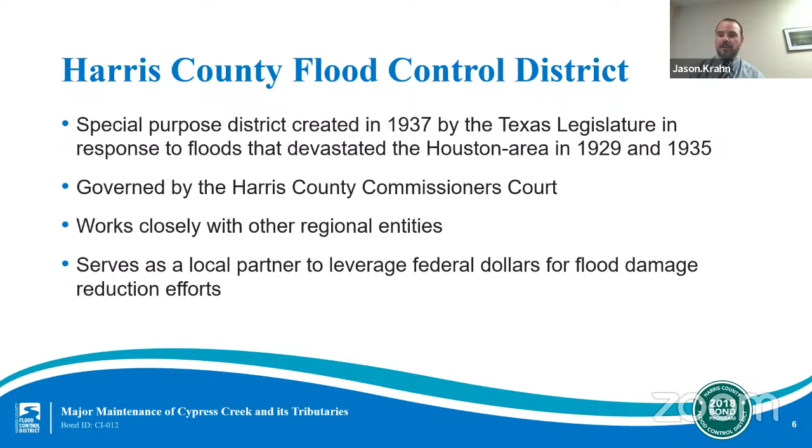The Flood Control District is a special purpose district created by the Texas State Legislature in 1937 in response to devastating floods that hit our region in 1929 and 1935. It is governed by the Harris County Commissioners Court and works closely with other public works entities, such as the Harris County Engineering Department and the City of Houston. Our organization was created in part to serve as a local partner and project sponsor to leverage federal funding for flood damage reduction projects. Since our creation, our mission has expanded, leading to billions of dollars in federal, state, and locally funded infrastructure improvements.

The Flood Control District's mission is to provide flood damage reduction projects that work with appropriate regard for community and natural values. Understanding that our systems mean many things to many people makes it challenging to construct effective projects that also provide the multifunctional use communities seek, as well as construct them with regard to natural values in our highly urbanized and continuously growing region.

Harris County includes 23 main watersheds, comprising approximately 1,800 square miles of land and more than 2,500 linear miles of channel. This includes man-made channels, natural streams, creeks, and bayous. To imagine the totality of this infrastructure, please note that 2,500 miles is approximately the distance between New York and California.

The 23 watersheds are all distinct geographical regions of land that serve as a catchment area that drains to a common main channel or drainage outlet. Each watershed has its own unique characteristics and needs based on its level of maturity and geographical location. The program and projects we are presenting tonight are in the Cypress Creek watershed, located in Northwest Harris County.

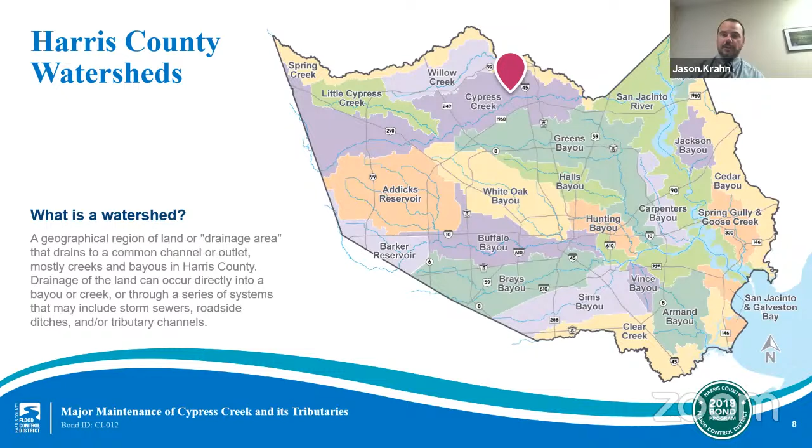Harris County and its surrounding area is flood prone for a number of reasons, namely because we experience extreme rainfall events along the Texas coast, including tropical storms and hurricanes. Our area has a largely flat topography with slow draining land. Finally, we have large concentrations of soil types, such as clays, that do not soak up excessive rainfall quickly.

While the Flood Control District plays a critical role in overall flood risk reduction for our area, we are one of several jurisdictional entities involved in the overall efforts for the region. When rain falls on your roof or other impervious cover, it flows through several jurisdictions, such as public and private driveways, parking lots and yards, and eventually into streets and drains managed by the Harris County Engineering Department or a municipal utility district or city, such as the City of Houston, before it flows into a larger basin, channel, or creek that the Flood Control District owns and maintains.

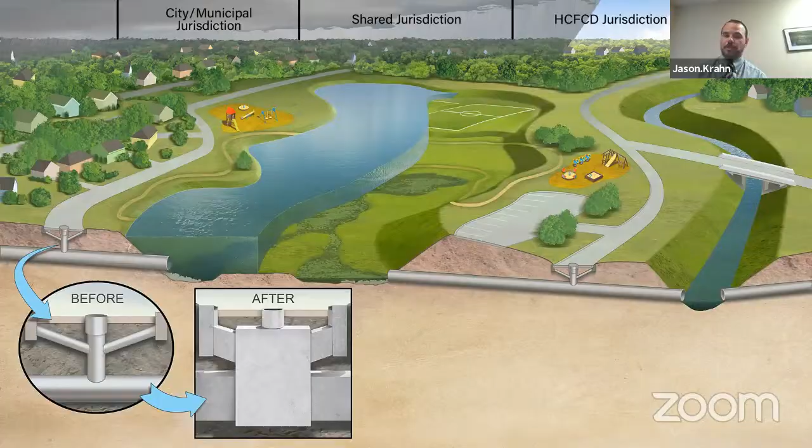On August 25th, 2018, Harris County voters approved $2.5 billion in bond funding for flood risk reduction projects. This vote happened after a series of 23 meetings were held with community members across Harris County, one per watershed. This resulted in a list that makes up the now 181 bond projects being funded.

A total of more than $1.43 billion in partnership funding has been secured thus far to progress the 2018 bond program even further.

The actual schedule of each individual bond project will depend on a variety of factors, including the overall project planning, design, and construction life cycles. Some tasks included in these life cycles, such as environmental permitting, right-of-way acquisition, and utility relocation, or in some cases, partner funding requirements for a particular grant, may extend the time it takes to complete the overall schedule of the project.

Project list and estimated schedules are updated regularly on our website.

As our bond projects move forward, we're making significant progress towards added resiliency in Harris County. An update shared with Harris County Commissioners Court in January of this year highlighted a few of the stats.

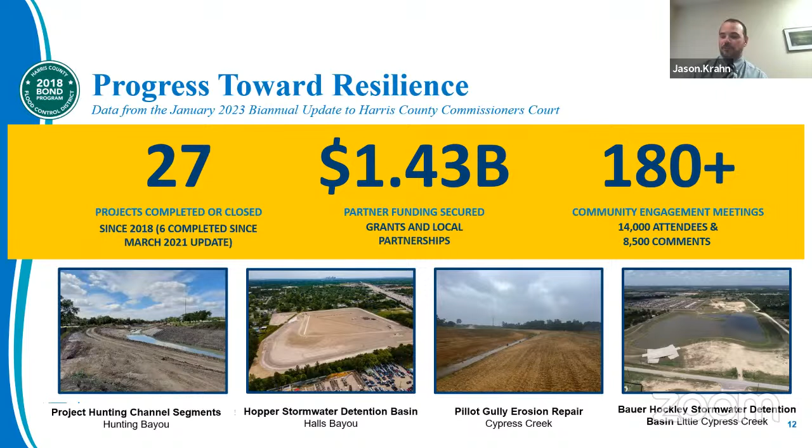We'll continue these biannual updates moving forward to share progress on the overall bond program.

While the voter bond was for $2.5 billion, the full cost of every project in our bond project is almost $5 billion. So we made it clear from the start that we would need funding partners to obtain the full potential of the constructed projects in the bond program.

As I've mentioned, we had some success so far by securing more than $1.43 billion in partner funds for projects across Harris County. And as this graphic illustrates, there are many partnership opportunity sources, including federal, state, and local funding that the Flood Control District is working to secure for Harris County.

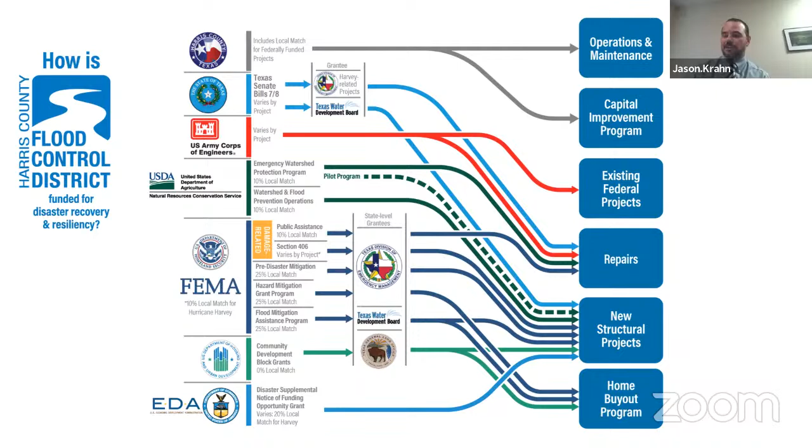Each agency has its own definition of an eligible project, as well as its own requirements for local match funding. So the Flood Control District works diligently to match each project to the appropriate partnership opportunity.

Switching gears, we will now discuss the portion of the program that is specific to the Cypress Creek watershed and the major tributary maintenance associated with the Cypress Creek and Tributaries project.

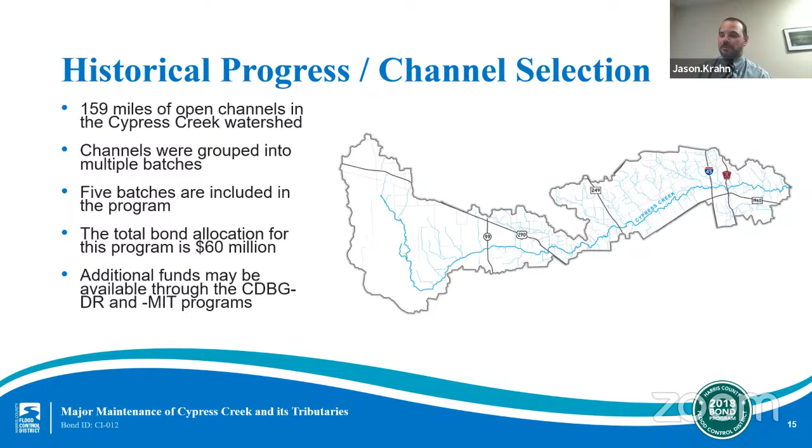The program effort includes areas along the main stem of Cypress Creek, as well as its tributaries, where the Flood Control District has property rights to conduct work.

The types of channels included in the effort are either newly constructed or previously modified from their natural state. All natural channels are excluded from the program, with the exception of a few specific segments of work on the main stem.

Environmental restrictions prevent work on natural channels without receiving permits that are very costly and very time-consuming to obtain.

For the first 3 batches of the effort, there will be nearly 20 miles of channel improvements in the Cypress Creek watershed.

As previously mentioned, there will be multiple batches of channel improvements over the course of the program life.

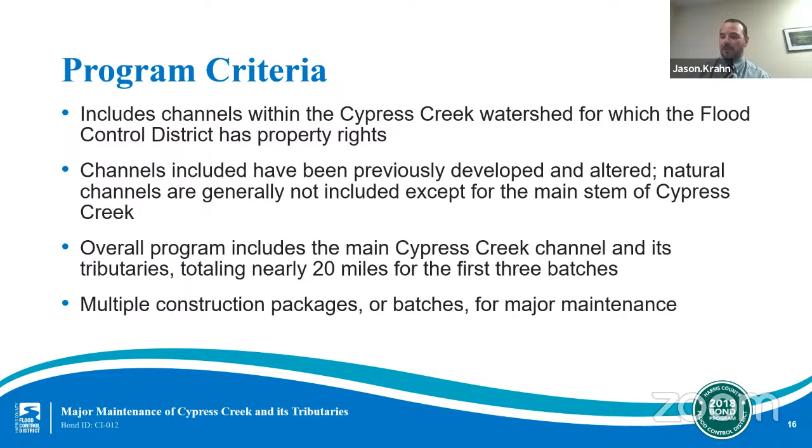A variety of restoration projects will take place during the life of this program, such as removing accumulated sediment from the channels, commonly referred to as conducting a desilt; replacing outfall pipes, which are conduits that carry stormwater from adjacent neighborhood ditches and storm sewer systems into flood control systems; repairing slope erosion and channel bottom scour caused by fast-moving water; reestablishing maintenance berms by clearing vegetation for project and long-term maintenance access; repairing damaged concrete channel lining where needed; and removing encroachments from flood control district right-of-way so they do not obstruct stormwater conveyance or access.

Each of these project types plays an important role in our efforts, and we will now discuss a few of them in depth, starting with the nature of work that must be done before a project can take place.

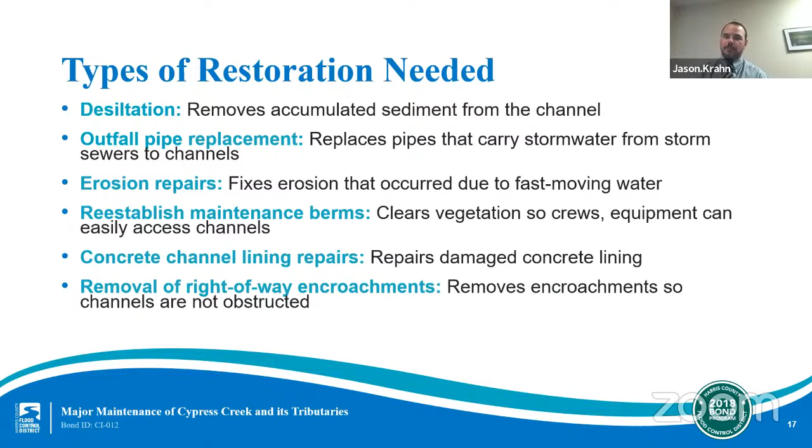We understand the natural value of trees and their importance to residents of Cypress Creek watershed, and we've worked extensively with our urban forestry team to identify tree protection zones and best management practices for working around trees, such as root pruning, air spading, and other vegetation management and removal needs. We have identified and are working to protect as many mature, sound, large, native trees as possible along the channel.

We have conducted extensive vegetation removal to reestablish maintenance berms for project and long-term maintenance access, which was one of the maintenance activities mentioned earlier.

Once project construction is complete and the sites have been stabilized, our forestry team will evaluate the sites for additional vegetation enhancements through our planting programs.

I would like to mention that when we discuss the batch 5 work along the main stem of Cypress Creek, we will not be able to protect the trees and vegetation as judiciously as on the other tributaries. This is because more gentle slopes are needed to stabilize the channel section and stormwater detention efforts constructed as part of batch 5, which will include clearing some existing trees to build the associated basins.

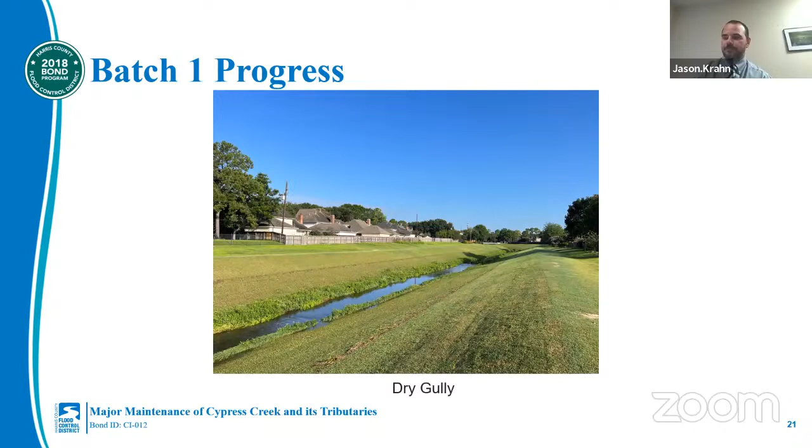Batch 2 work included 6 miles of sediment removal and disposal and minor repairs across 9 different channels located generally north of Cypress Creek near State Highway 249. The cost for this batch was $3.3 million, and construction kicked off in late 2021. Like batch 1, batch 2 was also completed in late 2022, ahead of schedule.

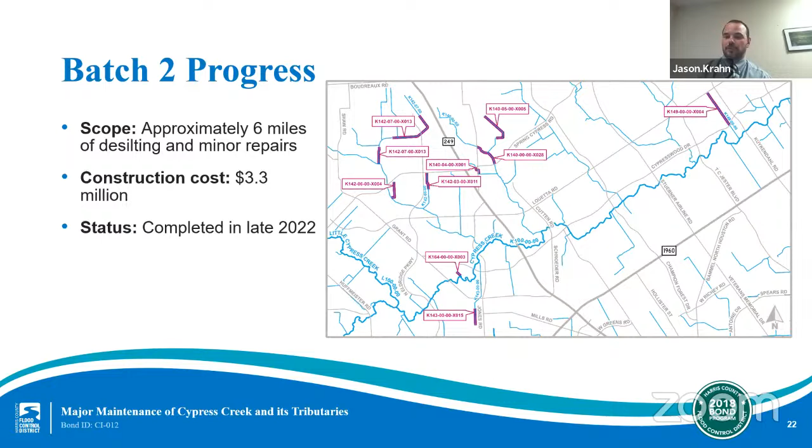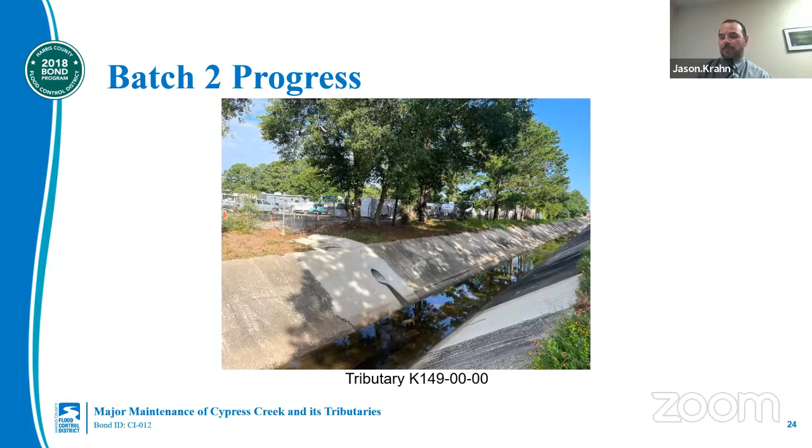Here is an overview of the cumulative work completed in both batch 1 and batch 2. To summarize, batch 1 consisted of work on 7 channels totaling 8 linear miles. We excavated and disposed of a total of 111,500 cubic yards of sedimentation. We emplaced around 107,000 tons of rock for erosion protection, and we installed nearly 15,600 linear feet of new storm sewer outfall conduits.

Batch 2 consisted of 6 linear miles of channel system, providing service to 9 channels. In this batch, we excavated and disposed of a total of 13,000 cubic yards of sediment and placed nearly 7,200 tons of rock, and installed around 7,200 linear feet of storm sewer outfall pipe and conduit.

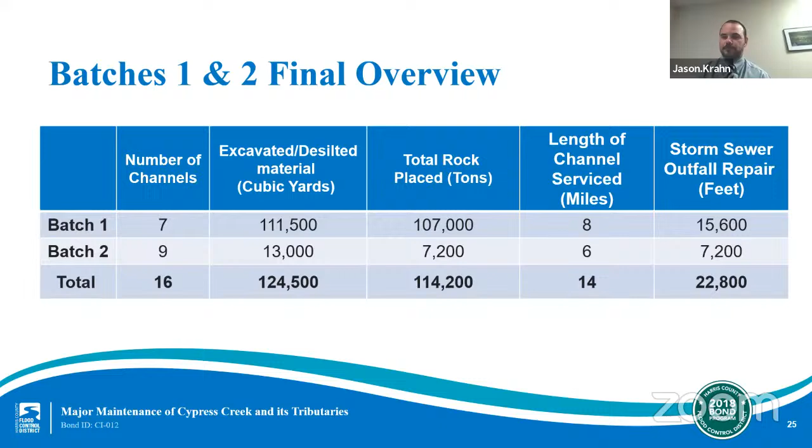Now we will look at batch 3 work, which began construction last summer. This batch includes 6 linear miles of work consisting of general channel repairs and sediment removal and disposal on 12 different channels. The cost for this batch of work is $13.8 million.

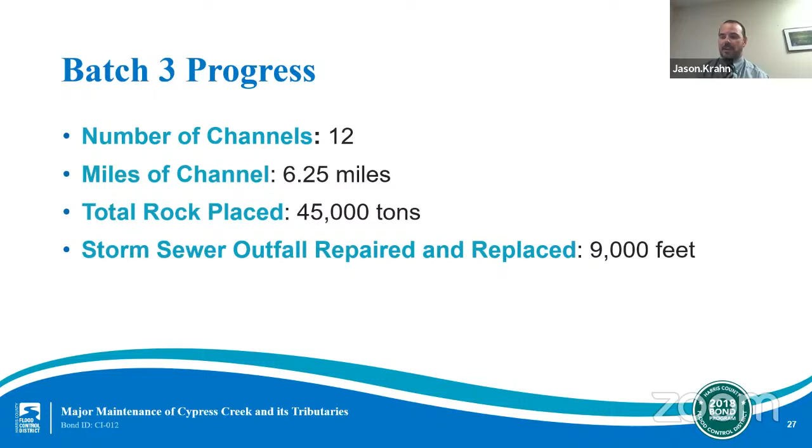Here's an overview of the anticipated work projected for batch 3, estimated to be complete by summer 2024. This work will take place across 12 separate channels with more than 6 linear miles of channel work, including nearly 45,000 tons of rock to be emplaced and a total of nearly 9,000 linear feet of storm sewer conduit replacements.

Here we can see a few pictures of the current progress we have made on batch 3. The first picture is of tributary K124, or Seals Gully. This part of the channel is upstream of Bridgeview Lane. The next image is of tributary K111, also known as Turkey Creek, located near the intersection of East Richey Road and Aldine Westfield Road.

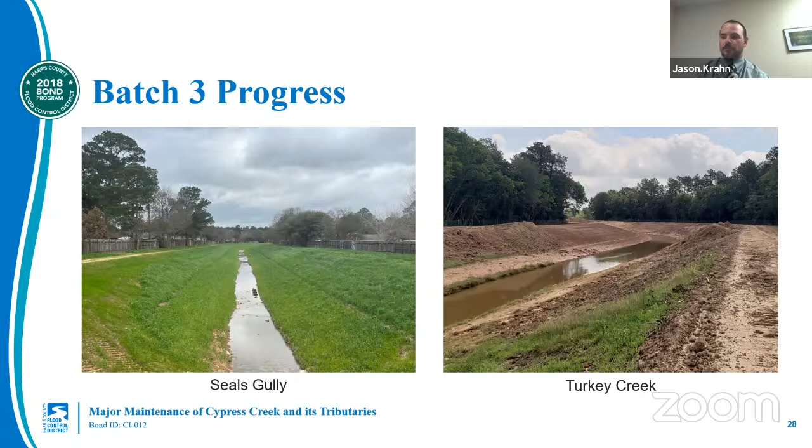Moving to batch 4 work, we intend to award a construction contract later this summer and expect construction to begin later this fall, with an estimated completion date around the winter of 2025. The cost for this batch is currently estimated to be $13.6 million, but we will have a better understanding of the actual projected cost to construct when we award a construction contract later this year.

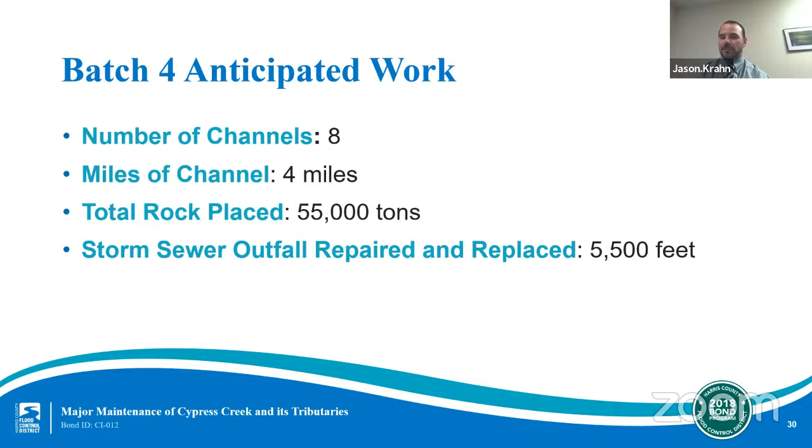The anticipated work for batch 4 construction will include work along 4 linear miles of channel on 8 different channels. We are estimating that we will emplace 55,000 tons of rock and replace 5,500 linear feet of storm sewer outfall conduits.

Now we will briefly talk about the planned rehabilitation work on Cypress Creek included in batch 5. The rehabilitation of rectified sections of Cypress Creek will potentially be funded through Community Development Block Grant for Mitigation, commonly referred to as CDBG MIT, and Community Development Block Grants for Disaster Recovery, commonly referred to as CDBG DR.

These funds will come from the U.S. Department of Housing and Urban Development via the Texas General Land Office. The CDBG-DR program has $320 million of funding, while the CDBG-MIT program has $504 million of funding.

The list of projects for CDBG-MIT and CDBG-DR funds was determined by the Flood Control District, the Community Services Division, and the Harris County Commissioners Court using criteria such as low to moderate income percentages, urgent need, no right-of-way needed to be acquired, and other factors laid out by HUD and the Commissioners Court. The final list of projects was approved by Harris County Commissioners Court on June 6, 2023.

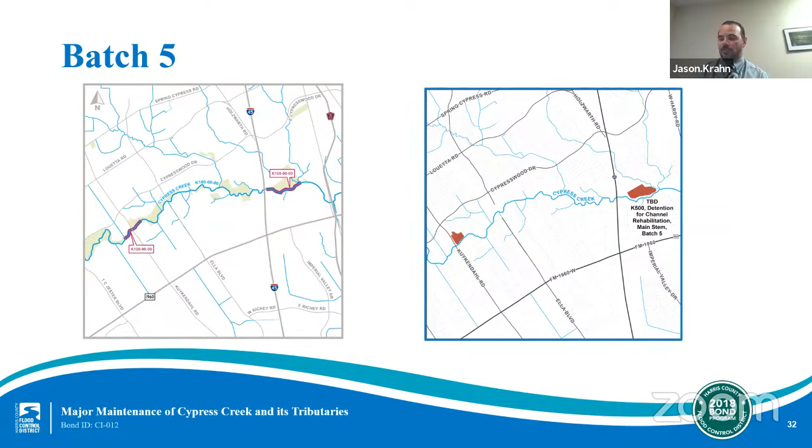The 2 projects included in batch 5 are channel stabilization projects located along 2 portions of Cypress Creek and associated stormwater detention basins to mitigate the channel stabilization improvements associated with each project. Each of these are separate CDBG lists and have their own funding timelines. However, we will now cover each.

The first of the 2 projects is the channel rehabilitation project that is on the CDBG-DR list. The scope of work for this project will be conducted on 2 different segments of Cypress Creek, one at Kirkendall Road and another at I-45. This project will potentially receive $20.27 million of partner funding, while the remaining $250,000 needed will come from local funds.

50% of the total funding from the CDBG-DR list must be spent in LMI census tracts or census block groups with a 51% or higher LMI index. The remaining funds could be used on urgent need projects, which is what both of these projects are considered to be.

All CDBG-DR funds must be expended by June 15, 2026, meaning the project must be closed out before this date. We are currently working to determine more exact dates as we refine our project schedule and close in on a date for construction to begin. We do know at this time that this effort must end in just under 3 years.

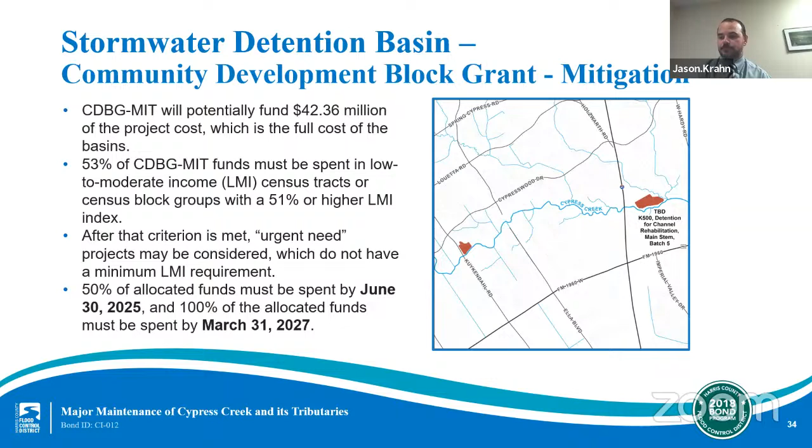Design contracts were awarded earlier this summer, and we expect design to take between 12 and 18 months, with construction to begin after that.

In addition to everything already covered, the Flood Control District received a separate $7 million grant from FEMA for the Kickerillo-Mischer Preserve erosion repair project, located east of Highway 249 and north of Cypress Wood Drive. This project is comprised of erosion repairs on a segment of Cypress Creek and a sediment removal and disposal effort.

The sediment removal and disposal effort is similar to the Cypress Creek Watershed Sediment Removal Programmatic Project. Like the sediment removal program, this project is also currently in the design phase.

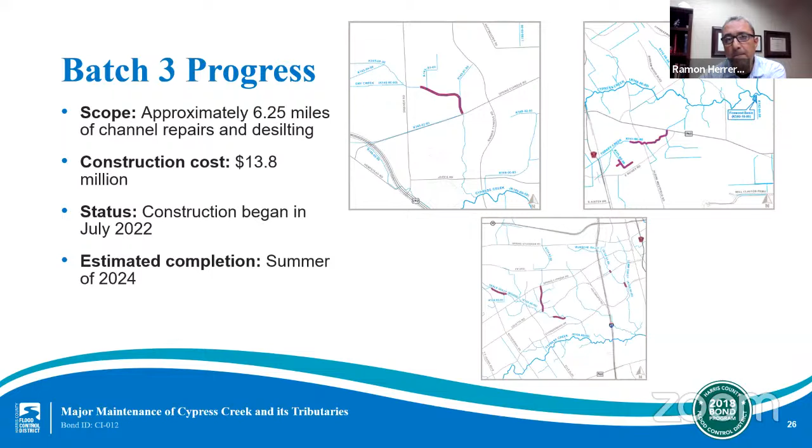All right, go to another question. Ramon, can you maybe run us through the timeline again for folks who are just tuning in to the meeting tonight? Sure, Sheldra, no problem, probably went through a little too fast. So again, the timeline, as Jason Krahn described in great detail, there are 5 batches. Batch 1 and batch 2 have been completed in late 2022. Batch 3 initiated construction in July of 2022, and it's under construction now, it will be completed in summer of 2024, so in 1 year. Batch 4 will begin this fall of 2023, and will be completed by winter of 2025. Finally, batch 5 construction will be completed in spring of 2026.

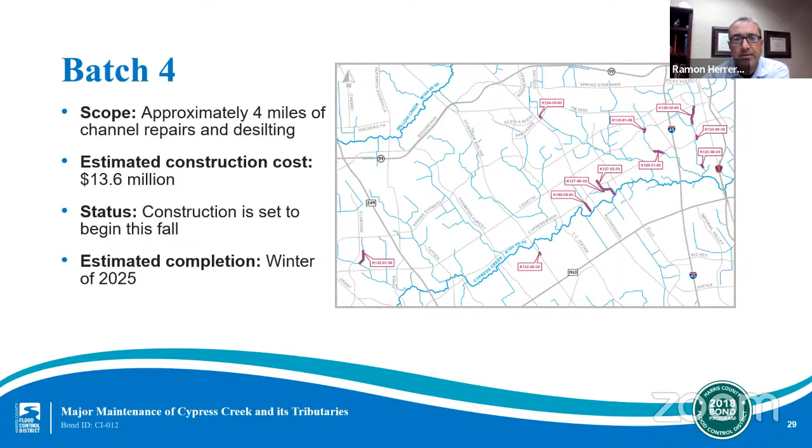Good deal, thank you for that. Jason Brock, David is asking in the Cypress Creek area, how much expenditure has gone to and remains to achieve original design water carrying capacity? When will the carrying capacity be sufficient to handle a repeat of Hurricane Harvey? So a couple of questions in there.

Yeah, I would say that one of the major projects that we did complete on Cypress Creek itself was at the Inverness Forest Levee, which is downstream of IH 45, Interstate 45. That project was about $12 million to restore it to its original design capacity. Most other efforts on Cypress Creek, as Jason mentioned, would be more of a type of side slope repair at certain areas, so we're not necessarily restoring the Cypress Creek channel back to its original design.

Thank you for that, Jason. Next question is for Ramon, and Jim is asking approximately how many acre feet of detention will be required to accommodate the bank changes in batch 5? That's a great question. Right now our H&H study is still ongoing while we're doing preliminary engineering design. There will obviously be detention mitigation needed, but we don't know the answer to that at this time, that's in progress.

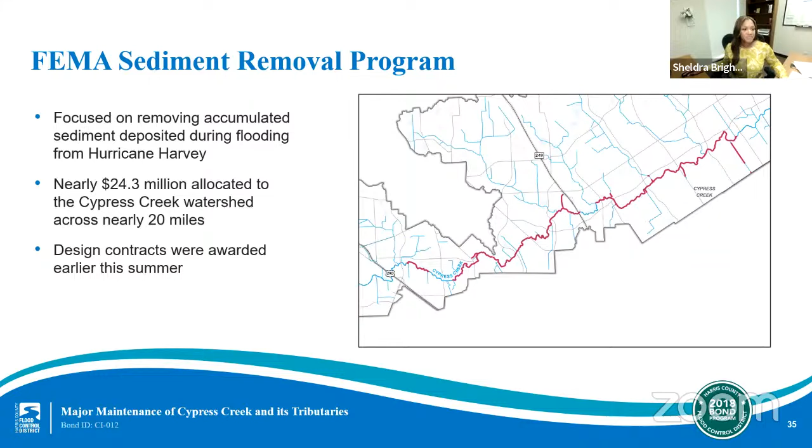Ramon, Jim is asking, can you please estimate approximately how far back the top bank will be shifted in the implementation of batch 5? It's a good question. The design is still pretty preliminary. Our geotechnical engineer is working through the slope stability analysis, which is being reviewed by the geotechnical engineer at the district. It's just going to be enough to have stable slopes and adequate maintenance berms per the design guidelines. Everything will be within the flood control right of way, so we don't want to disturb vegetation that's not needed to be disturbed. That's still being worked through in our design package.

Okay, thank you for that. We are getting some questions about capital projects in Cypress Creek. Just want to let you know we've received your question. We hear you, and we're going to get back to you with more information on that.

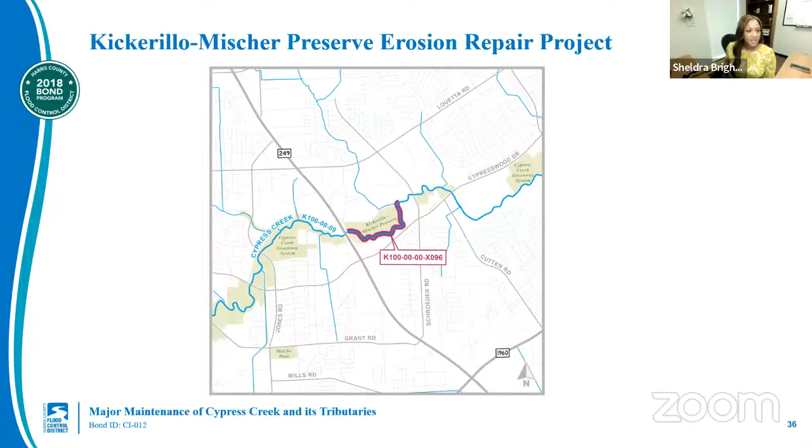Thank you, Jason. And for batch 5, here's another question that just came in, and we appreciate that. Again, this is for Jason Brock: for batch 5, will there be any more land needed to be acquired at or near Kickerillo-Mischer? At this time, there is no additional right-of-way anticipated that's needed to be acquired.